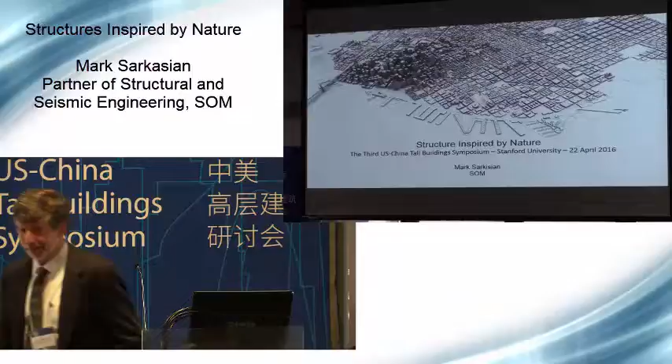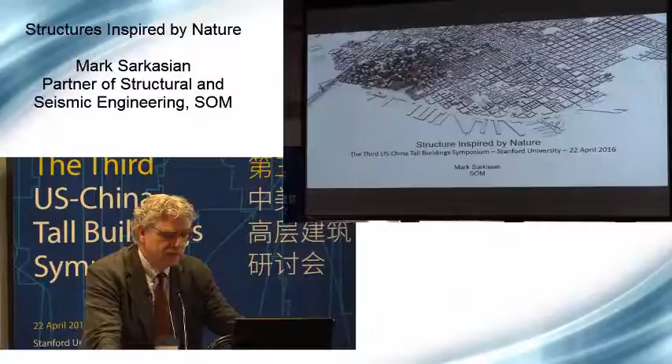Thanks for hanging in there for the tail end of the day. I'd like to bring us back to the city and talk about structure and nature, but more importantly, how the city informs ideas related to design, and how nature might inspire us to do a better job with performance.

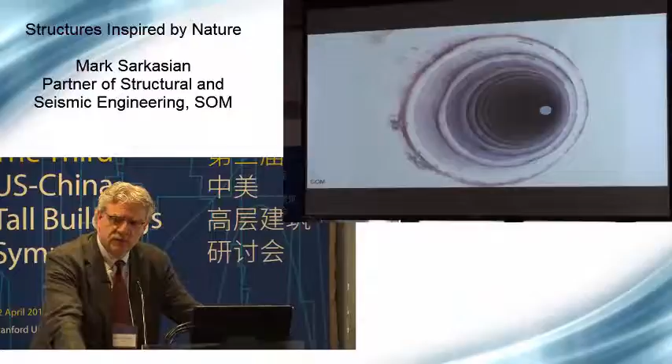I'd like to talk about the relationship of architecture and structure to the ground, and challenge ourselves to think about whether we design structures to be permanent or temporary. In cities and what it means to us, the environment, and the relationship between the United States and China, and the inspiration and battle to come up with new ideas to make this a better place.

How cities and people respond to buildings. Buildings don't need to be 100 stories tall to be loved. They don't have to have expressive structural systems. They might have a graphic response that creates a place where people can congregate, maybe share ideas.

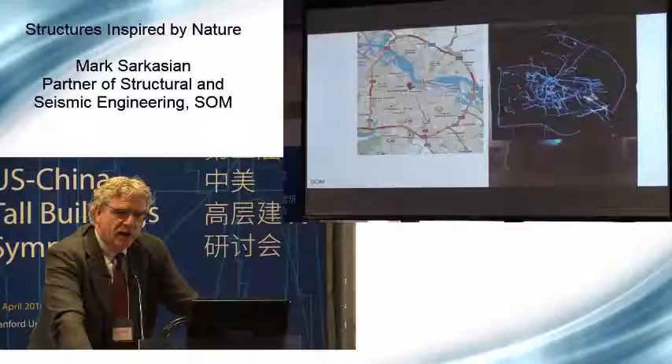So the question is, are our cities ordered by the streets that manage the flows of vehicular and pedestrian movements, where areas in between are void and absent of life? Should our structures be restricted to regular load paths defined by elements set up on disciplined grids, ignoring the spaces in between, ignoring their contributions only because an order has been imposed upon us?

Should our structures be defined as static objects, or as objects in continuous motion? Should we continue to think of our structures two-dimensionally instead of volumetrically? So in the city experiment, the tracking of people walked on sidewalks, traveled on roadways that we defined - were the spaces in between not relevant?

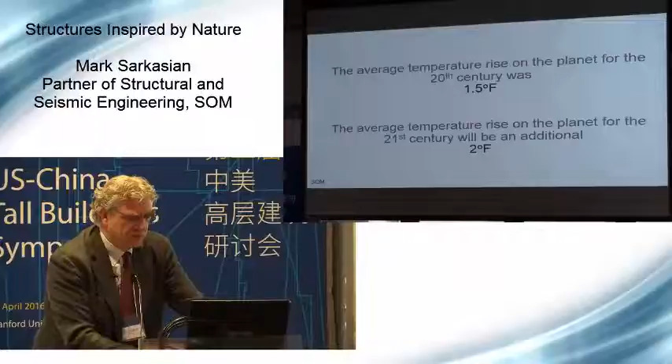So we're seeing something happen, and it's real, and people would argue that perhaps it's natural, but most would argue that it's not natural, that we're impacting the environment based on carbon emissions, and this global warming is changing the way we use this place.

When we build buildings, sometimes it takes 20 years for the carbon we put into our building at the time we build it to catch up with the carbon emitted through the operation of the building. So one of the challenges is to think about construction, material, and time, because it impacts the amount of carbon we put into our structures at the time we build it, and more importantly, over the life of the building.

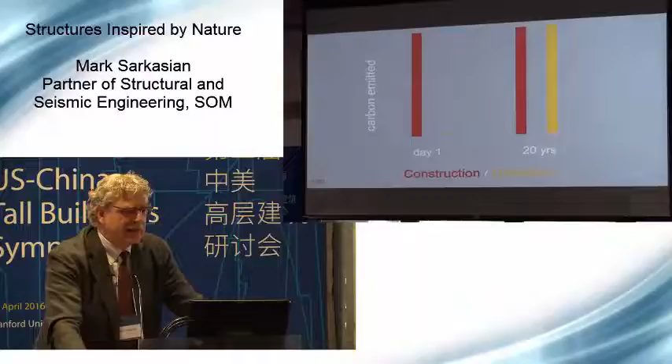As Steve has mentioned, if we increase the performance by introducing devices or other mechanisms into our structures, we can decrease the carbon that could be emitted because the repair is less - we perhaps don't have to rebuild. So these are the things we need to think about. It goes beyond just building safety, it's building performance.

A few years ago, we had a graduate student working with us as an intern, and an architect in our studio who was interested in bamboo, the form of bamboo. So I said to the student, there's something really interesting about bamboo - it's not just that it's beautiful, but it's strong, and we've been using it for thousands of years. What is it about it that might inform the built environment in a different way?

Bamboo is hollow, and the bands you see over the height are diaphragms. The diaphragms are closer at the bottom than at the mid-height, and then they close again as you get toward the top. You wonder about it and why - is it random, or is it something that always happens? Well, in fact, it's mathematically predictable. It's not random. You can actually predict the placement of those bands because they're there to keep the walls of the bamboo from buckling.

So the tighter the spacing at the bottom, the demand is the highest. You get closer spacing, it opens up where the demand is less, and then it closes again at the top because the proportion of the diameter to the spacing of the rings is such that you get a smaller geometry change. It's also something that can be defined in the diameter and the wall thickness of the bamboo.

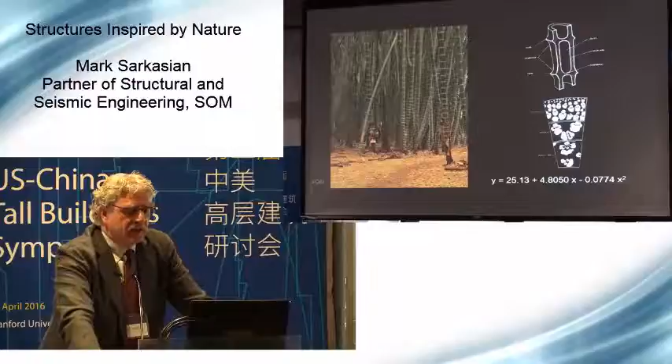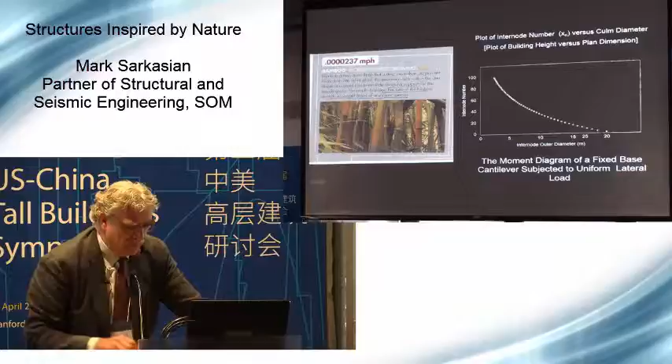It's the same diagram that you can extract from this growth pattern of bamboo. So you wonder if this relationship is important, and it's important for us to think about perhaps how it gets applied to what we build. And that's the difficult part.

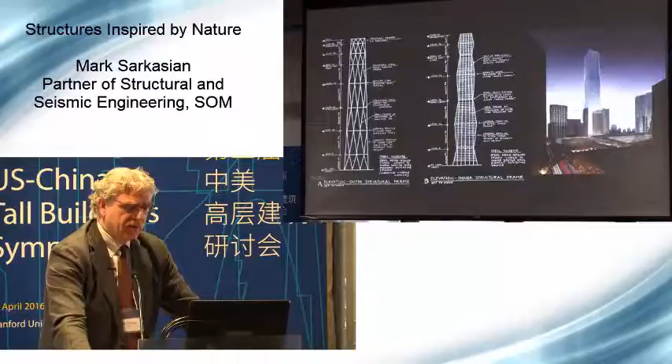What we looked at in this case was an incremental spacing of a diaphragm that connects the inside to the outside, and instead of equally spacing the diaphragm connection, we used the idea of the bamboo, so it was tighter at the bottom, open toward the middle, and closed at the top. And what we did is we created this structure that could perhaps be thought of as a shell on the outside, braced by these diaphragms and tied to the center core.

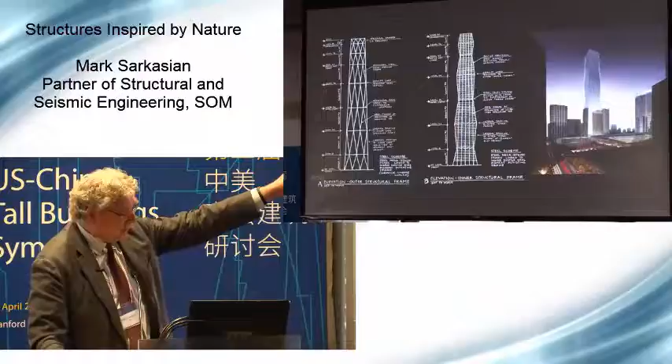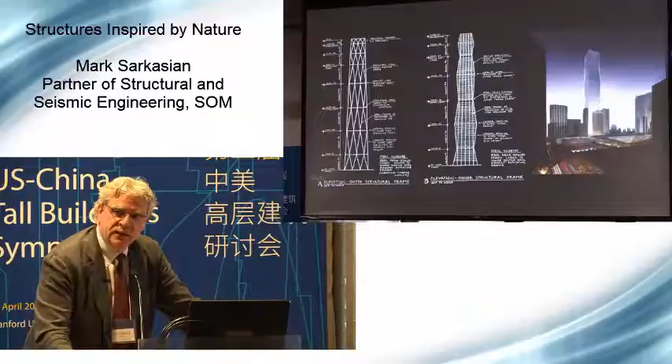That's the first pass. We took that shape in the middle diagram and connected it to the outside, and found that this interaction between inside and outside, with an irregular diaphragm spacing and outriggers connecting them, could save the material for the lateral load resisting system by about 15%. Incremental changes, but positive changes in terms of how this building behaves and the amount of material used.

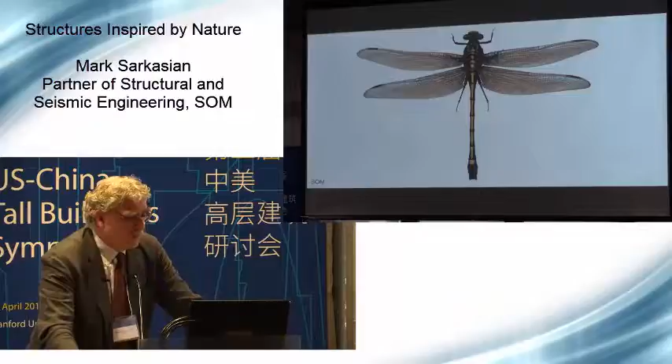These incremental segments that you see in bamboo are found in other places too. It's a cantilever, a hollow section braced by a diaphragm, that could be mathematically predicted.

So what does it mean for our buildings? China has been very important to SOM's practice of engineering and architecture. There have been some opportunities that have been really unusual. It started for us largely with two projects. This is one, in Shanghai.

This is the Jin Mao Tower.

And the other project was the ICBC project in Beijing. Professor Fu, who you heard earlier, has been a very important part of the relationship between the United States and China in thinking about structures and their performance, from the point of view of an expert. He was also involved with us in some unbuilt work that happened before this project in Shanghai.

So here's a building that has very complicated systems. It uses concrete and steel. The core is an octagon. There are eight large composite columns on the outside, and structural steel infills the rest.

We talked about creep and shrinkage earlier—the problem of connecting a building as you build it, and the fact that the creep in the core is different than the creep in the columns. So as you build this building and tie it together with these large trusses, outriggers that resist lateral load, wind, and seismic, you quickly find that the outrigger gets ripped apart under its own displacements as you build it.

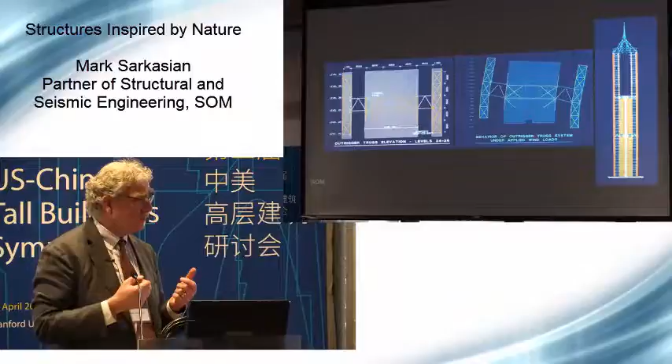So we have a problem. We have a project.

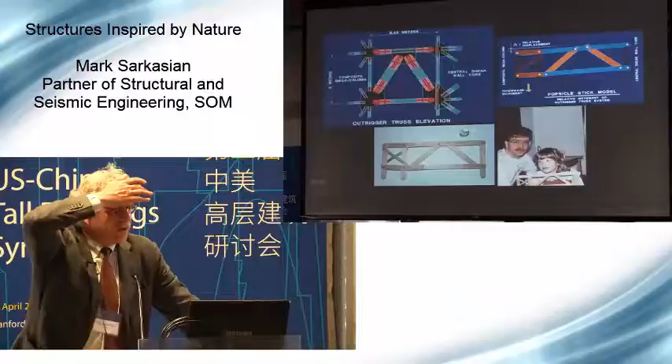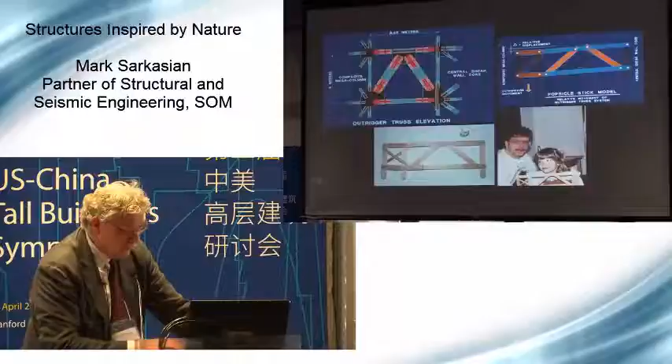It's a simple model. The point about this is it all of a sudden set off a way of thinking for us, that we could free up these trusses by introducing pins and allowing them to move through relative displacement for a period of time during construction. It started with this simple model, and the trick was the slots you see at the top.

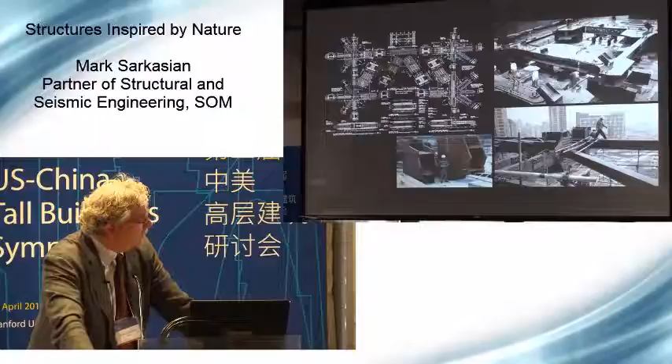The model turned into the working drawing, turned into the prefabrication at the plant, and then the site. The scale from that simple pin model to those connections you see next to the man who was a site representative for us gives you a sense of what these fundamental ideas might mean to construction at a large scale.

So the project allowed us to think about behavior, in this case performance, and perhaps in the future this relationship with nature. So what is it about nature?

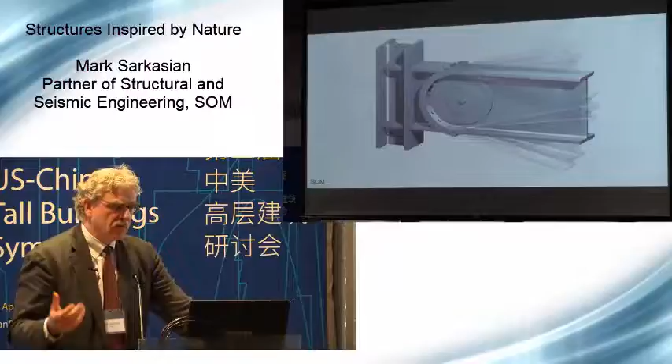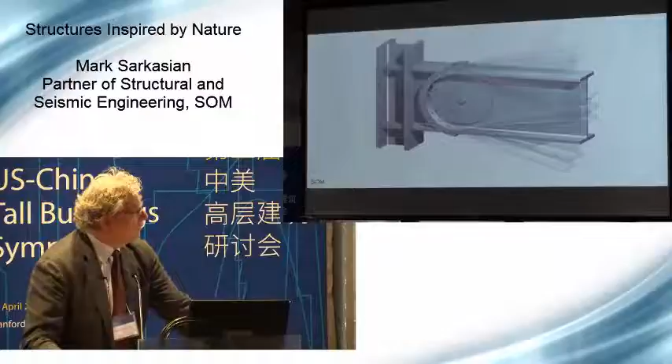It's a really interesting thing, and I think it's not just about plant growth, but about how bodies work, whether it's your head or your shoulder. It informs other ideas that get into our buildings, like joints that move, similar to a joint in your body. Curved systems make sense when you talk about bending moments and a release of energy, perhaps through friction.

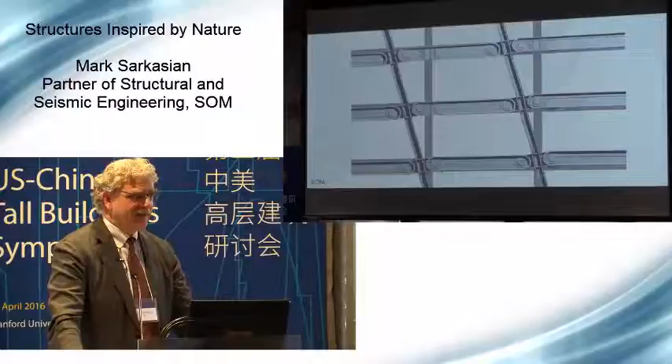When demands get very high, instead of keeping joints locked, they rotate, move, and dissipate energy, but protect the base building. It's a natural response, and it helps us think about frames and dissipation of energy differently. There's been mention of systems and devices, whether seismic isolation, unbonded braces, or shear wall systems partially decoupled from the ground through post-tensioning and damping systems. These are the ideas that set us forth with natural response.

Through the development of that idea, we started to think about building performance, and we started to think about things like the hurricane and the idea of natural growth. For many of us, we think about the hurricane as an applied force.

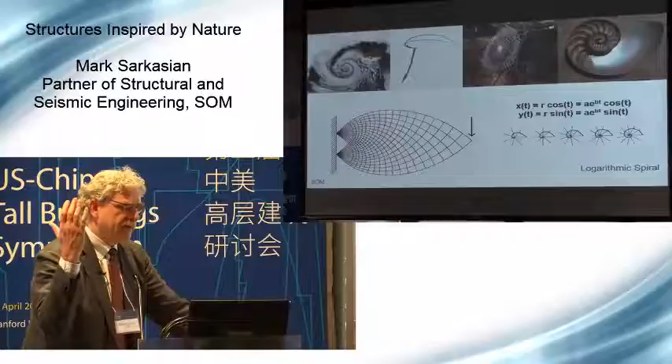It's in plan, you see it on the news. The highest level of force is right at the wall of the eye of the hurricane, and it changes as you go out. It's mathematically predictable. But the idea is, instead of the applied force, perhaps it's a resisting force. So the center perhaps has the highest resistance, and it reduces as you get out. We took this idea, this hurricane, stood it vertically, and thought about it volumetrically.

But how can we define structures that look to natural growth and natural performance as a way to make our buildings more efficient?

A few years ago, I went to this place with my daughter. I have three girls, and I had this small requirement when they started college: you have to go on a trip with me, and it's not a vacation. It's going to a place to learn about art and architecture and maybe a little bit of engineering. I don't have any engineers, by the way. The three girls aren't engineers, so I've scared them off it. But anyway, we went to this place, the Eiffel Tower, and Ahmed talked about this earlier.

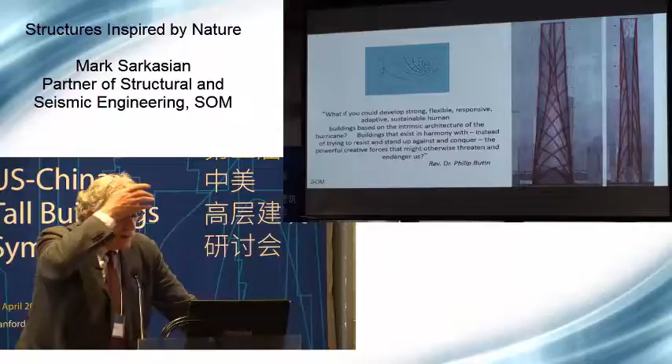At the time, a friend of mine who's the head of the San Francisco Theological Seminary in San Anselmo wrote this, and you can find it online. For his incoming students, he said: what if you could develop strong, flexible, responsive, adaptive, sustainable human buildings based on the intrinsic architecture of the hurricane? Buildings that are in harmony with, instead of trying to resist and stand up against and conquer, the powerful creative forces that might otherwise threaten and endanger us.

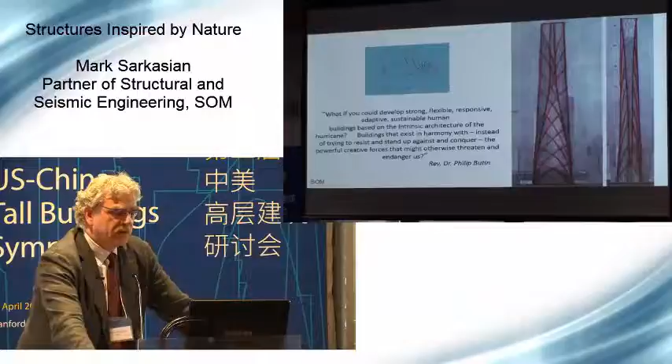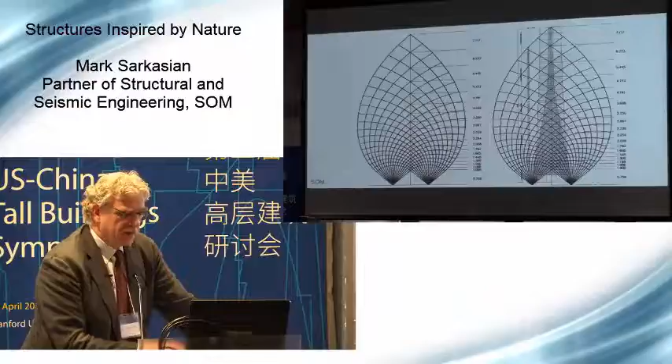In other words, why stand up in a way that's so resistant? Why not think of this coexistence between structure and force, and try to come up with the best idea? So that's what we did. We took the concept of Michell, developed in the early 1900s, and looked at this building in a way that you could open the base, create density of the frame at the bottom, and then open it toward the top to come up with the most efficient system.

There's a theory that's been around for a while—some people will say this is kind of nothing new, it might just have a new name, I don't know. It's a theory of emergence, the idea that a collective of similar elements working together are far more powerful than when they're working alone.

The idea is influenced by boundary conditions—some type of condition. In the case of a termite mound, it might be the environment and the fact that these mounds are self-cooled, or birds in flight cutting down air resistance, or cities, or places where people collectively create greater ideas. This energy that gets created is far more powerful when working together.

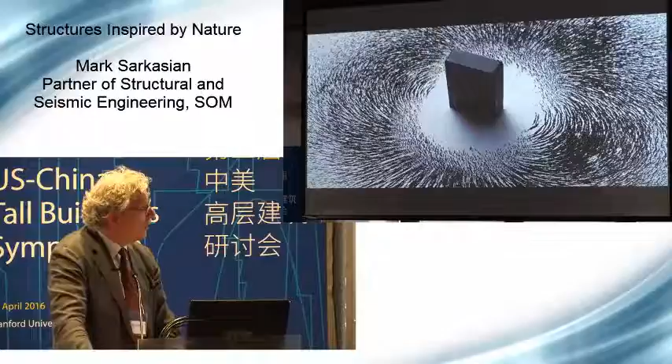So if we think about material and the placement of material in our buildings, how can we do a better job of minimizing the amount of natural resources that we use? And think about buildings behaving from the very raw sense.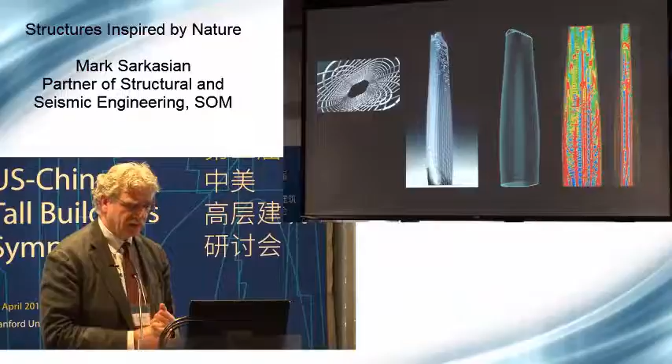So what is it about this behavior in nature? We've been experimenting with these ideas about braced systems, never assuming that what we've done before is the most efficient way of design.

And not just taking that idea and applying it as a literal response, but looking at varying the density—making the systems denser at the base where demands are highest. The orientation of the bracing system is more vertical where the gravity demand is high.

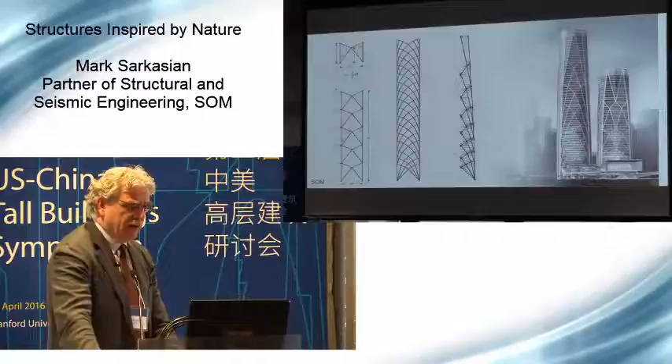And trying to come up with a way that takes the information about behavior, thinks about it, and interprets it into something that might be beautiful.

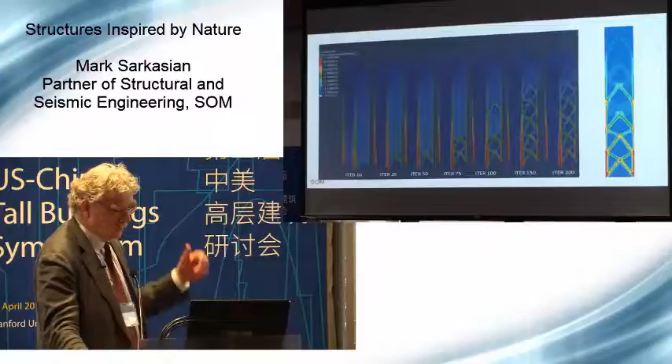So this is the response with a single point load at the top of this form and two points of support. The response on the right is what you get from it. So buildings perhaps will look different.

The building on the left is my favorite building, and it's in Chicago. The reason why it's my favorite is because we stuck our necks out for something super tall, and we tried to come up with a way to manage wind and gravity loads so it was super efficient—two buildings, two towers, became one tower because the amount of material in that building was about the same as it was for the lower buildings.

But maybe the building will look different. The building you see on the right is actually under construction in Shenzhen. We hope within the next year or so the structure will be well along and we'll see this framing system at the perimeter of the building.

So it's one of these things where you dream about where we're going, and then you think about other applications, like bridges.

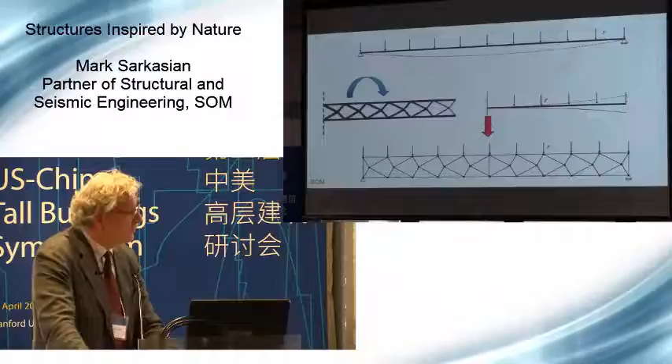If you take the building and turn it on its side, mirror it about its center point as a simple span with support on each side, and take that tall building concept and connect it, you find that geometry yields a far more efficient truss than the other.

So these are things that are in progress, ideas that might yield a different way of looking at truss systems, maybe in three dimensions.

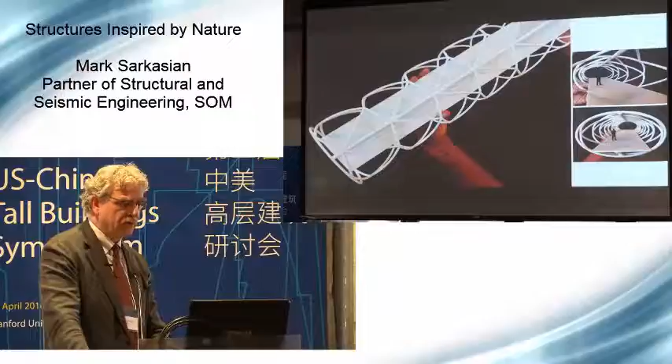But maybe we should be thinking about trusses in this way—we just go at the simple truss, we've drawn it a million times. But maybe the geometry of these trusses should be much more of this asymmetrical position of framing along the length. So a couple more ideas.

Cities are about data, and I think data is wonderful if we can figure out a way to manage it. We find it in our own firm. We have information that people generate every single day. Just to get our arms around this is really, really difficult. Others at universities and practices, I'm sure, feel the same way.

But what if we thought about our cities as fields, as I call it, sensory fields, where seismicity and wind are understood in a better way? And if we're able to monitor the field, perhaps it can inform the building, the city, in terms of how we design.

And when we design buildings, we do all this really fancy analysis. It's super sophisticated. We design, we create drawings, we build buildings, and we take the analysis model and we put it aside. In fact, most models you can't ever run again after a certain period of time because software programs change. But what if we came up with a way to tie the analysis model to the ground? In other words, if your building understood, and you were able to mirror the building's performance with your analysis model, perhaps the analysis model could be embedded in the idea of building performance.

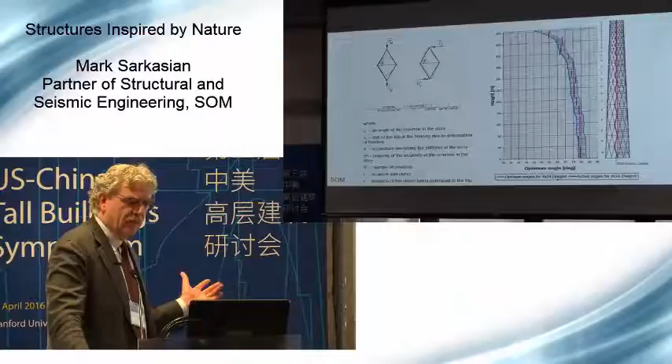Because we know where the demand is, we look at a zillion different load combinations, a zillion different directions. But if we understood the magnitude and direction of force, perhaps we could change the building at a moment in time where it's important.

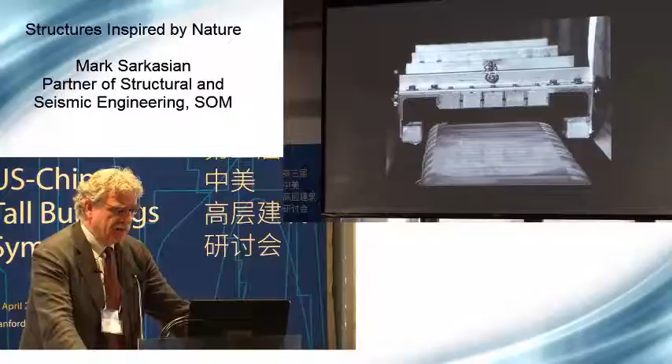People think this is kind of nuts, but there may be a way to separate the building today. Yesterday somebody would say, well, what happens when the power goes off and I try to create a magnetically levitated field? Well, today I can argue there are technologies with energy storage that could enable us, if we understood the oncoming ground motion, to decouple it momentarily with the backup energy source that would provide the power to do something like this.

And perhaps we can have structures that are self-reflective.

So the idea of introducing air into the handrails was enough to change the behavior. Using really super high strength material isn't so far-reaching. Material that has such high strength and is so active, when we put load into it, perhaps can be controlled by these devices.

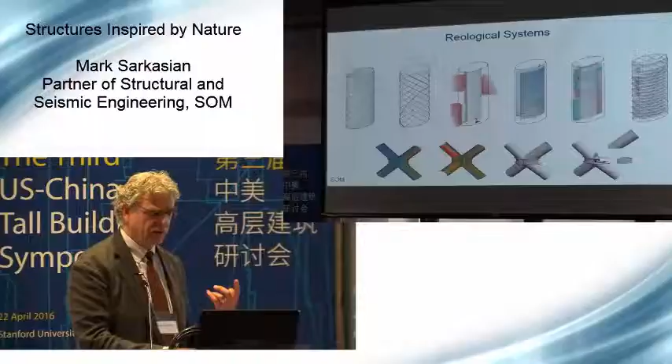And systems that are rheological, so buildings that we create are perhaps conduits for liquids. Not a new idea, right?

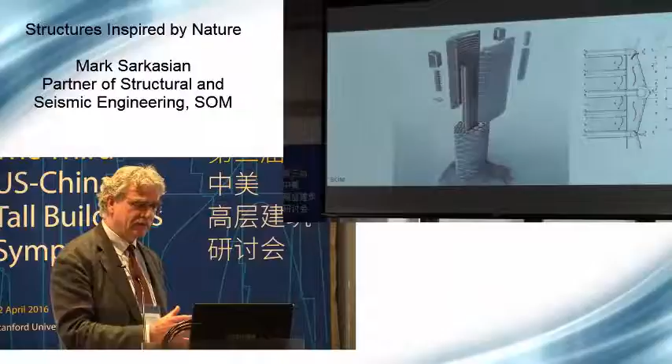But if you take buildings that we design today—and this is one of our projects that's almost finished with construction now, more or less starting occupancy—perhaps this building, which Todd C. talked about earlier, has some really smart, sustainable ideas where it's a double wall system and air can flow between the two walls. Forces flow very well around this structure, and it's a very efficient way. No columns—it's a 4-story diagrid bracing system.

But what if, instead of filling these tubes with concrete, we fill it with liquid? The liquid perhaps can change phase when demand is high, so stiffness might change over the life of the building. Responding to demand, liquid to solid, is the most basic idea. But material that can go through a phase change could be electrified, could be changed with some outside energy source.

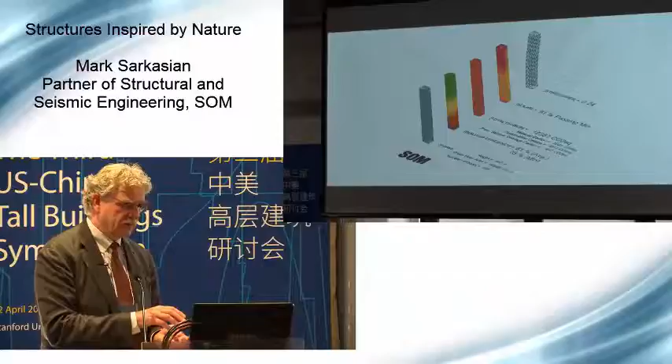We can think about this and plan cities based on the material type, carbon, perhaps geometry, the efficiency of the use of the floor, solar exposure, and maybe do it all at once. So the plan is perhaps not just a sight line or shadows based on site and geometry, but much more comprehensive—we look at materials and we're really sensitive ultimately to the environment because of these other parameters.

So what if the structures of the future can be designed based on sustained forces, using materials that internally flow in response to transient loading, increasing in density where necessary? What if the behavior was three-dimensional, considering the volume of the structure rather than just its perimeter? And what if the behavior emerged without a central controlling force, through a collective intelligence?

So what is it about these ideas that advance the geometry and architecture of these projects? There are a couple of things that maybe are worth looking at. I don't know.

These ideas are contemplated in a couple of documents that just came out. The one on the right is a second edition of a book written for Stanford, originally class notes for an integrated design studio here at the university. It contemplated architecture and engineering as one, looking at complex ideas at the end, and very basic site issues at the beginning—what we consider when we start designing these types of projects.

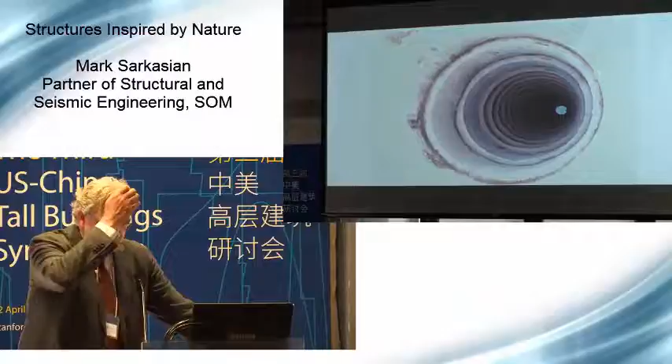So back to the ground. You know, we do all these sophisticated things, and we're making great progress, but there are the things that work that we do around the world.

This is in Shenzhen, and what you see is a group of people that build these caissons one by one. The most important job is actually the job at the top, and it's usually a family—a brother and sister, two brothers, or husband and wife. The job at the top keeps material from dropping into the hole while it's being hand dug. This foundation system works, and it's what several tall buildings will sit on, or have already sat on.

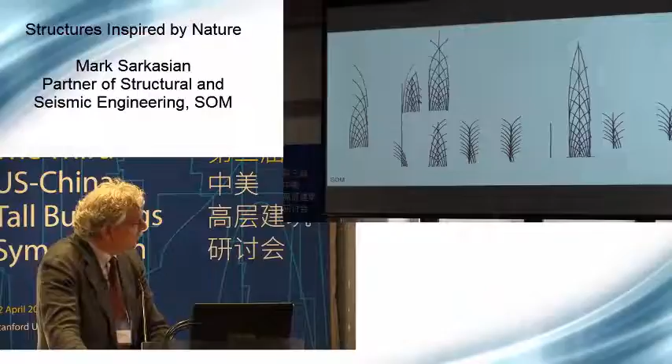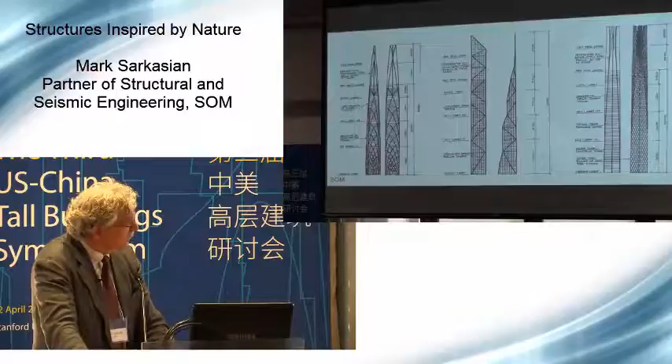So you wonder, when we look at these designs and concepts about nature and the sophistication of these principles, the basic ideas are very important for us to come back to—the ideas that work. But it doesn't hurt to dream about tall buildings and projects that may never happen, who knows. This idea of trying to come up with solutions that look different, that are maybe more efficient and hopefully more beautiful, that contemplate nature and things around us, and try to interpret and apply these to things we can actually build.